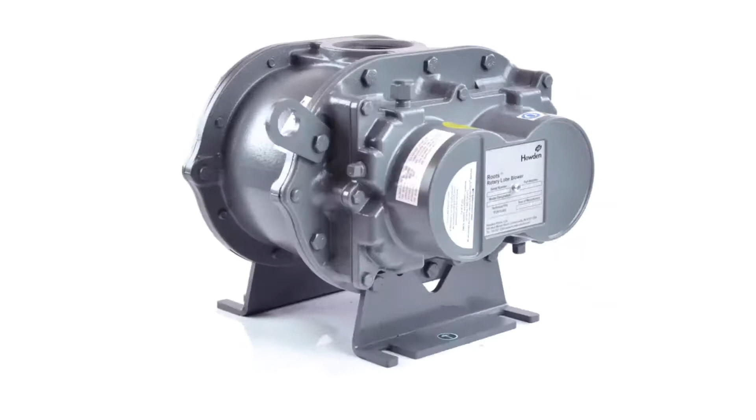For decades, the Roots Universal RAI, or URAI blower, has been the industry standard for rotary lobe positive displacement blowers. The URAI blowers have several series available, so in this video we will show you the differences between each series so you can choose the blower that best meets your needs.

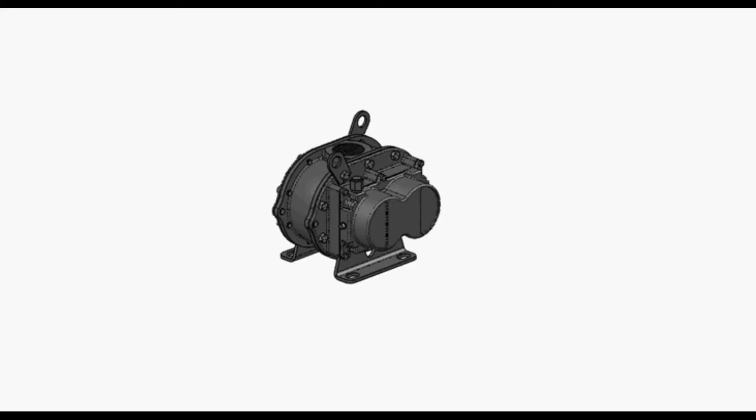The URAI series was created in the 1980s in a successful effort to standardize the units and make it much easier to replace and swap out blowers. Unlike previous series, the Universal RAI blowers featured standardized shaft sizes and other parts, as well as removable mounting feet that would allow the blowers to be easily reconfigured.

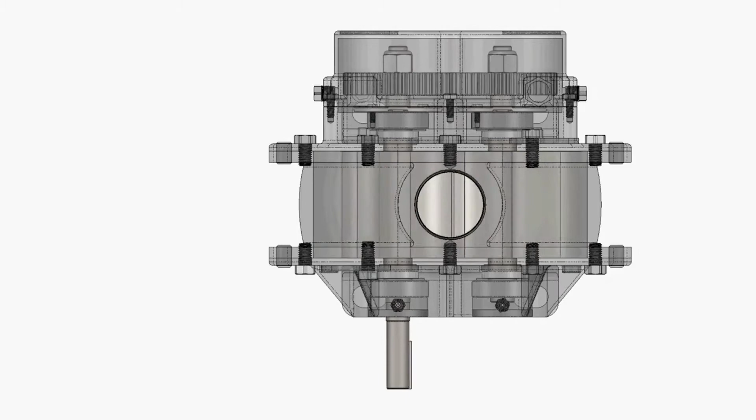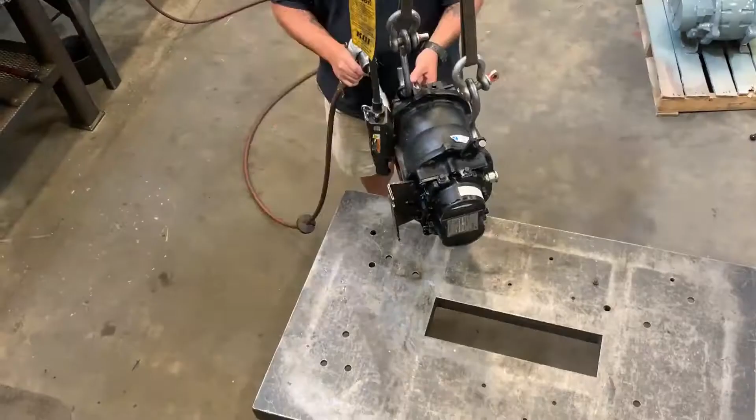The most common blower configuration has the drive shaft on the left with the air flowing vertically through the unit. Most Roots distributors will keep stocked blowers in this configuration. If a blower is needed in a different configuration, it can be ordered from the factory in the desired orientation, or a stocked unit can be flipped to the needed orientation. For basic URAI blowers, this is as simple as rotating the feet and moving the vents and oil plugs.

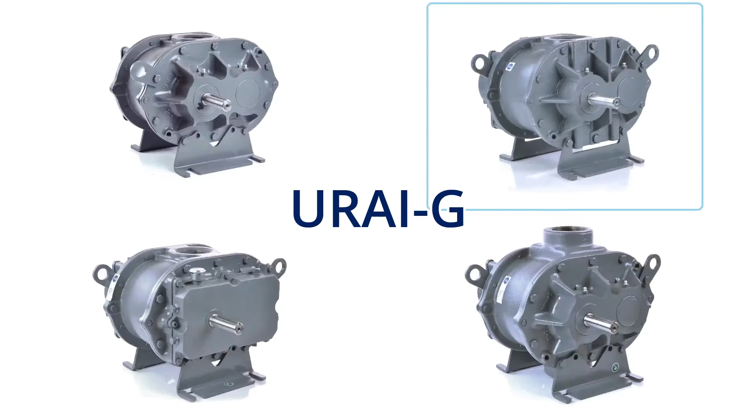The Universal RAI blowers have several series, each with different features. There are the basic URAI models, URAI-G, URAI-DSL, URAI-J, and URAI-J DSL models, which combine the features of the DSL and J series. There are also a few special options that we will cover later in the video.

The URAI series are the most basic Roots blowers. They are available in 17 different sizes, which can all be flipped to any of the 4 basic configurations. They use oil lubrication on the gear end and grease on the drive end. They are designed for air service in either a pressure or vacuum application. The flow range is 13 to 2,330 cubic feet per minute, pressure range of 1 to 15 psi, vacuum range of 1 to 16 inches of mercury.

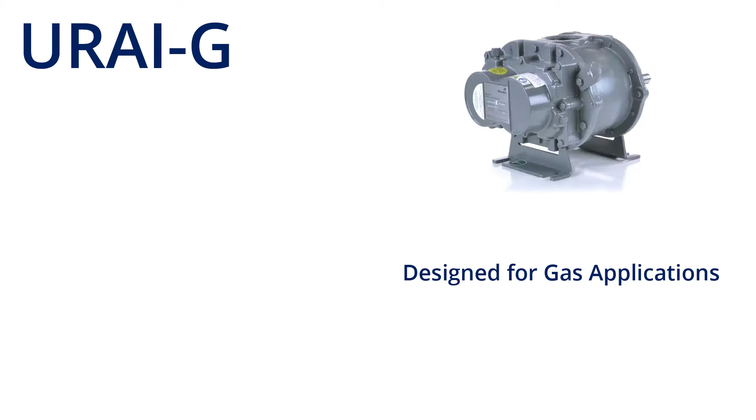If your application uses a gas other than air, the URAI-G series is designed to handle gas applications. Instead of the typical lip seals, URAI-G blowers utilize mechanical seals to minimize gas leakage into the vented oil-bearing chambers. At the factory, each URAI-G unit is mechanically tested and given a 15 psi-G static leak test. A 1/8 inch NPT purge port is provided between each headplate seal and mechanical seal. Available in 12 models, the flow range is 31 to 1,600 cubic feet per minute, pressure range of 1 to 15 psi, vacuum range of 1 to 16 inches of mercury.

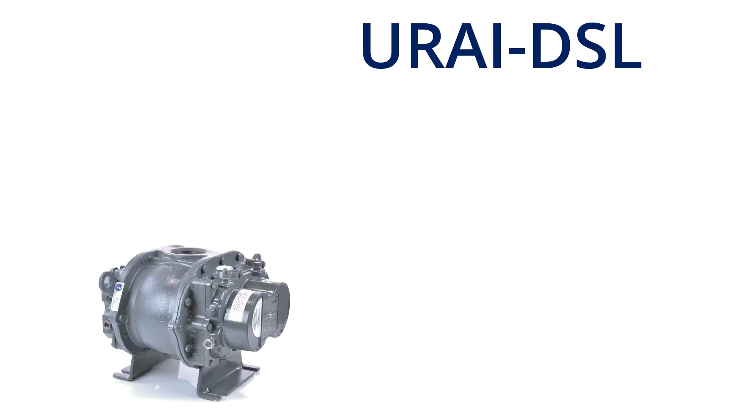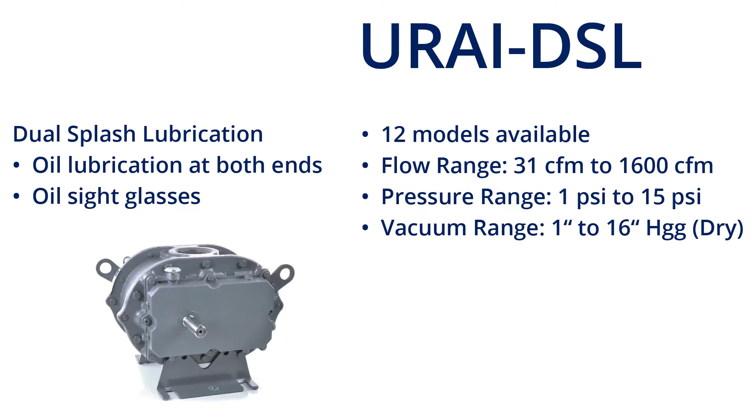DSL stands for dual splash lubrication, which means these units feature splash lubrication at both ends. This is an upgrade to the standard URAI models. Instead of grease lubrication on the drive end, the DSL models have 2 shaft-mounted oil slingers to lubricate the drive end bearings. DSL models also feature sight glasses to easily check oil levels. The flow range is 31 to 1,600 cubic feet per minute, pressure range of 1 to 15 psi, vacuum range of 1 to 16 inches of mercury.

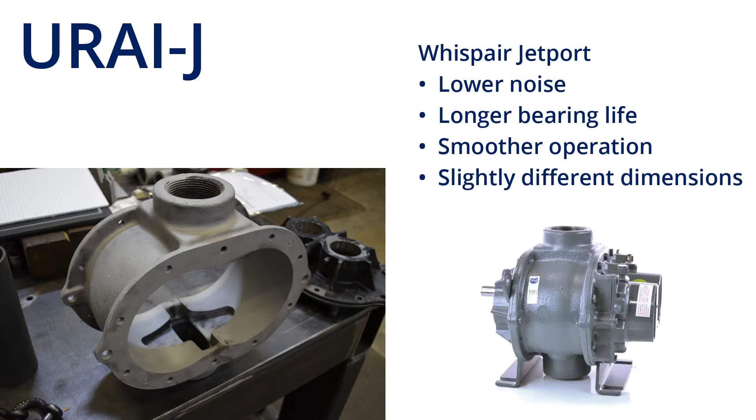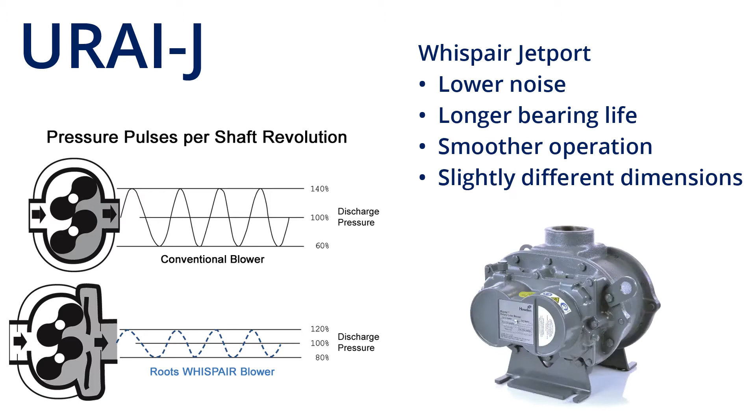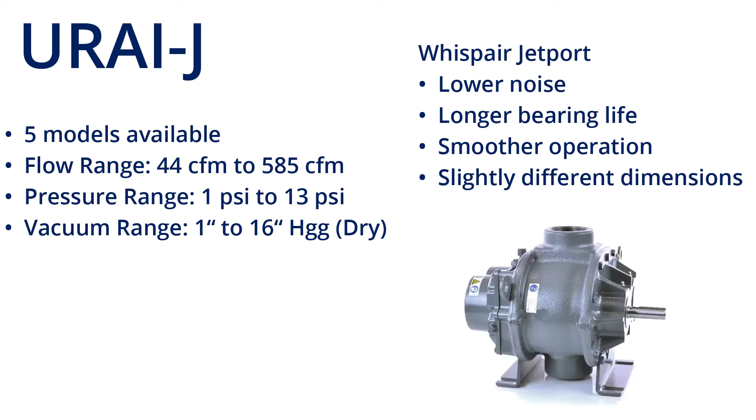The URAI-J models feature the patented Whispair Jetport that reduces the noise approximately 3 to 5 dBA. This design feature has a pressure equalizing effect, so these units can operate with up to 40% less pressure pulsation than the standard models. In addition to less noise, the reduced pulsations result in smoother operation for your blower and longer bearing life. Available in only 5 models, the flow range is 44 to 585 cubic feet per minute, pressure range of 1 to 13 psi, vacuum range of 1 to 16 inches of mercury.

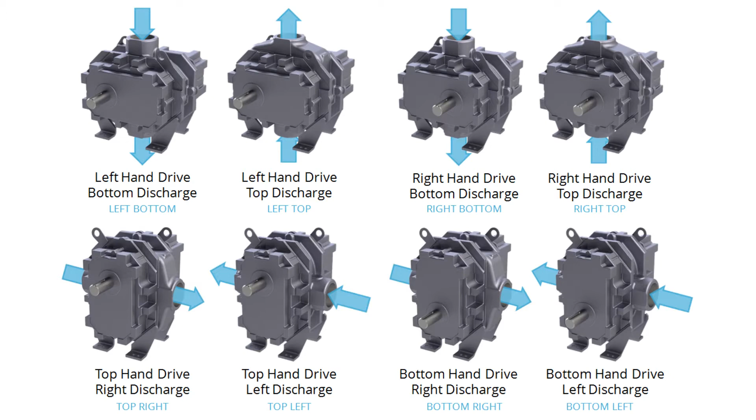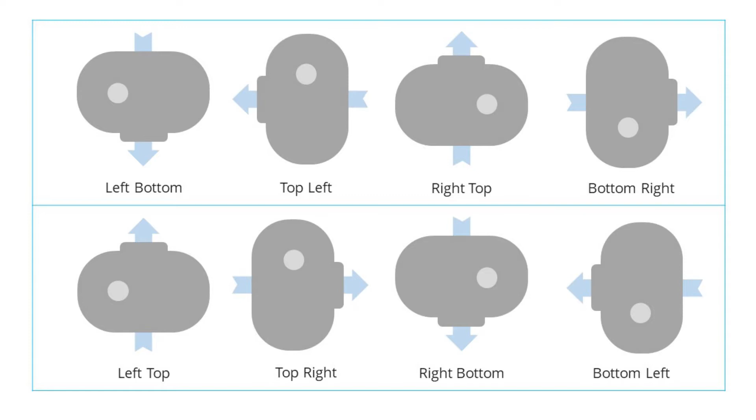Because the jet port must be located at the blower discharge, the direction of airflow must be specified when selecting your blower configuration. Blowers can still be flipped to different configurations with one caveat. Blowers in each group shown here can be easily flipped to other configurations within their group. However, changing the configuration from one group to another would require disassembly of the blower to rotate the cylinder.

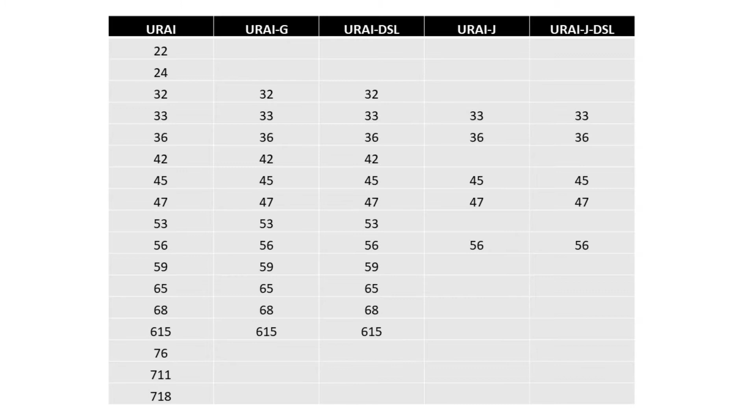www.pdblowers.com. If you have an existing Roots URAI blower, you can find your series designation in the model number on your blower's nameplate. You may also see a V or H, which typically indicate a horizontal or vertical drive shaft configuration.

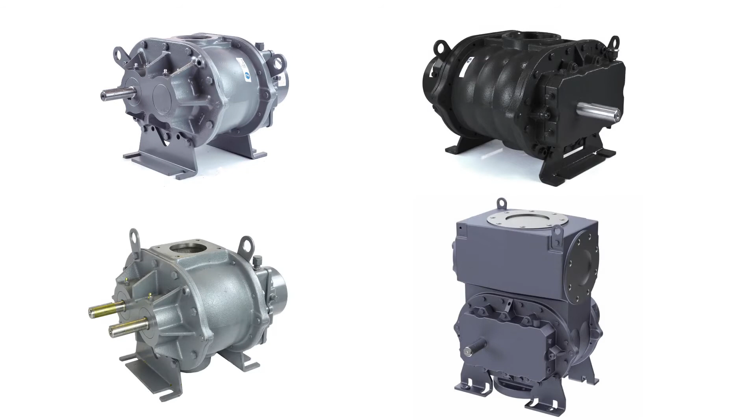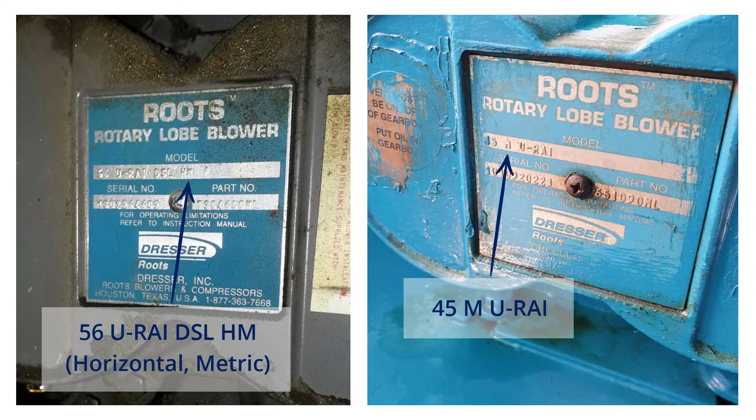At the beginning of the video, we mentioned there were some additional special options you might come across with URAI blowers. An M in your model number designates a metric unit. Standard URAI models use imperial measurements, but metric units are available. Metric units will have the same features and basic dimensions as the standard imperial units. However, they will have a standard metric shaft diameter, and the inlet and discharge connections will be BSP instead of NPT.

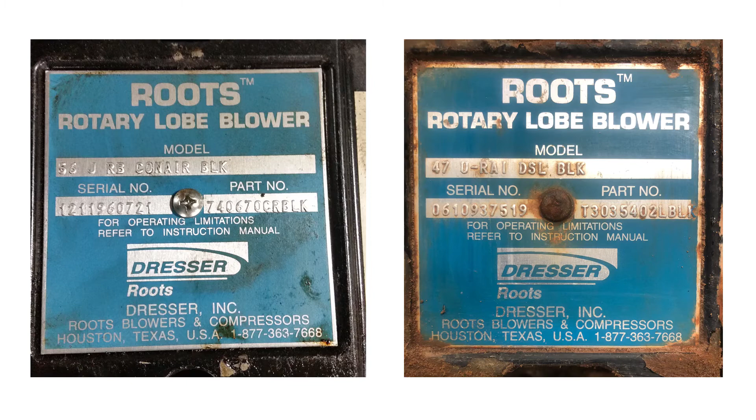If your blower is painted a different color than the standard gray, or if it has BLK in the model number, it is likely your unit originally was purchased from another equipment manufacturer who uses Roots blowers in their systems. These models are often the same as the standard units, however some OEM blowers could have different internal clearances. Before replacing your current model, PD Blowers can verify your unit serial number with the Roots factory to ensure it has the same performance specifications as a standard model.

If you see a Roots URAI blower with 2 drive shafts, you may have a unit that was originally produced for OEM Hydramaster vacuum trucks. These units are no longer regularly produced by Roots, but they can still be ordered if needed. PD Blowers keeps several of these replacement units in stock.

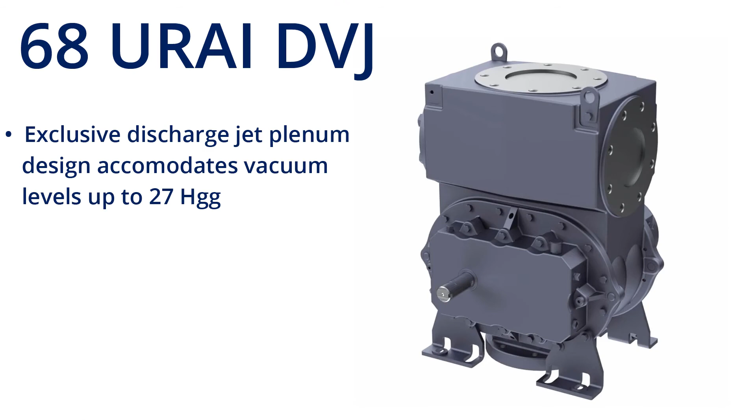Roots has one URAI model, the 68, that is also available in the DVJ series for high vacuum. DVJ models are easily distinguished by the large discharge jet plenum that allows cooler air to flow into the cylinder, eliminating the high discharge temperatures at vacuum levels beyond 16 inches of mercury.